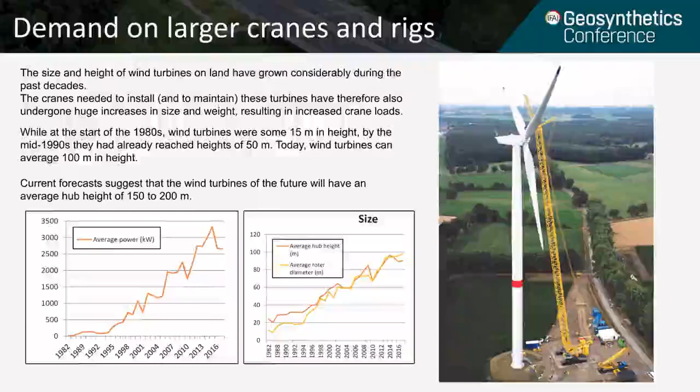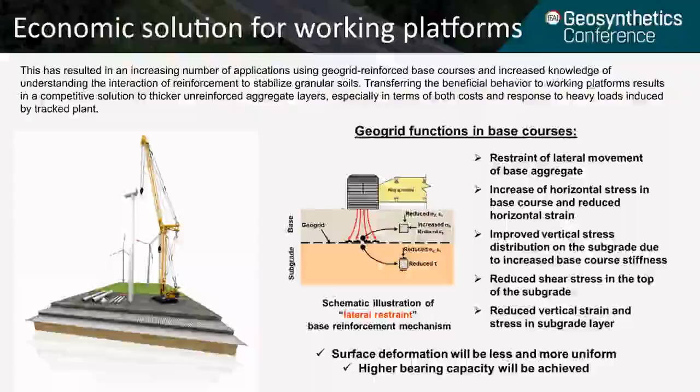It is very crucial to design the working platform package, including the thickness of the platform as well as the type of geogrids, precisely in order to withstand the operating loads from the construction machine on site. Otherwise, an accident or unexpected failure may happen. Here we have collected some types of failures that occurred over time in the past. Some were due to the very low distance of the construction machine from the edge of the platform, for example, the one in Brunei, Asia, or others because of very concentrated loads underneath the track, which caused a punching shear failure of the platform. Or it could be due to serviceability reasons because of very large deformation of the platform, which caused the tilting of the machine.

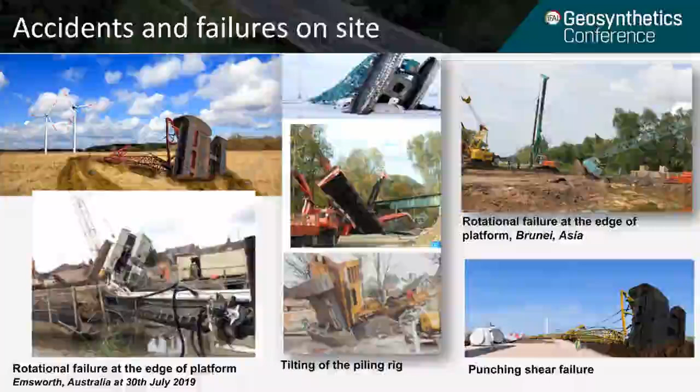So we have to learn lessons from the past and see which failures happened already and try to avoid them for future cases. For a precise dimensioning or design of a working platform on site, we need to perform 3 important analyses. The first one is the punching shear failure of the working platform.

This is a failure which normally happens when the working platform is subject to very high compression loads, and is characterized by very large settlements and deformations of the working platform.

There are different approaches in order to use it, and the most popular one is the BRE 470. This is not because of the accuracy of the model, it's because of the simplicity of the model and because of the wide range of application.

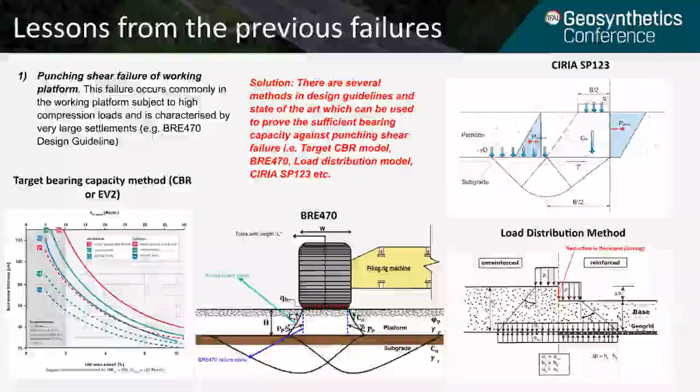You can use this model for cohesive soil and non-cohesive soil, but there are several weaknesses of the model that should be overcome in order to achieve a more accurate and safe design for punching shear failure of the working platform. The second analysis, which is normally neglected in practice, is the overall and rotational stability of the working platform,

using which we are able to identify the potential failure surfaces over which the construction machine, the working platform, and the subgrade may slide. This is an important analysis, especially when the subgrade is weak or when the construction machine is positioned very close to the edge of the platform, for example, 2 or 3 meters distance from the edge.

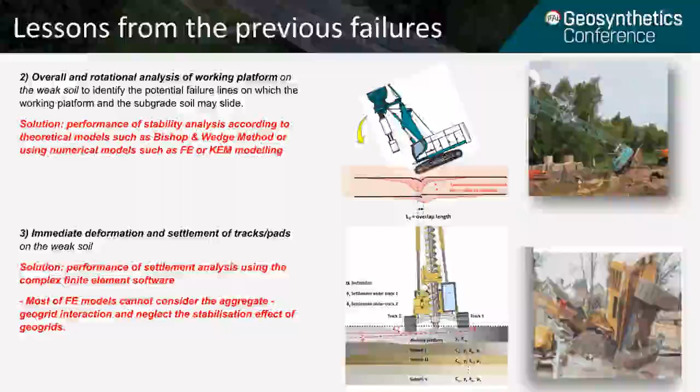The third analysis is related to the serviceability of the working platform, and using this analysis we are able to estimate the deformation and differential settlements underneath the track of the platform, and accordingly see how much would be the maximum inclination of the construction machine, and to control it.

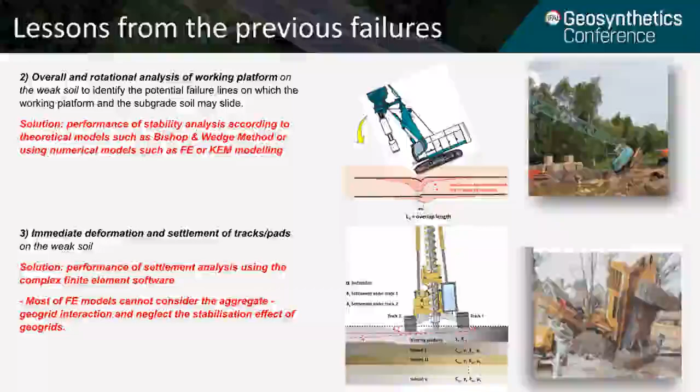For this purpose we normally need complex numerical models or complicated analysis, and even sometimes finite element modeling may not help us because it doesn't consider the stabilization function of GeoGrid, which is related to the interaction of GeoGrid and aggregate.

In general, there are several weaknesses in the current design procedure of working platforms that should be overcome in order to achieve a more reliable, economical, and in general, a better design procedure for working platforms. For example, the main important one is that the rotational failure of the working platform is neglected.

However, as I mentioned in the previous slides, there are several cases in which the rotational failure of the working platform becomes dominant. For example, when the construction machine is very close to the edge of the platform, or when the subsoil bearing capacity is not high.

The second one is that the immediate deformation of the working platform, which may cause the inclination of the machine, is normally neglected because of the complexity of the analysis.

And in general, the main important parameter, or let's say the only analysis which is considered for the design, is the shear failure of the platform. And even this analysis is dramatically simplified by some of the models.

For example, the one in BRE 470, which considers the actual failure plane of the working platform to be a vertical plane, which is not realistic, or it considers that the tensile strength of the GeoGrid is only mobilized in a two-dimensional environment.

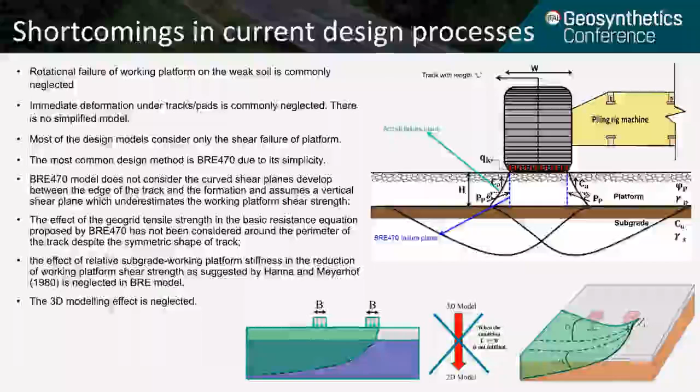And that's why in this study we have tried to overcome some of the weaknesses and to come up with a better and more reliable design process.

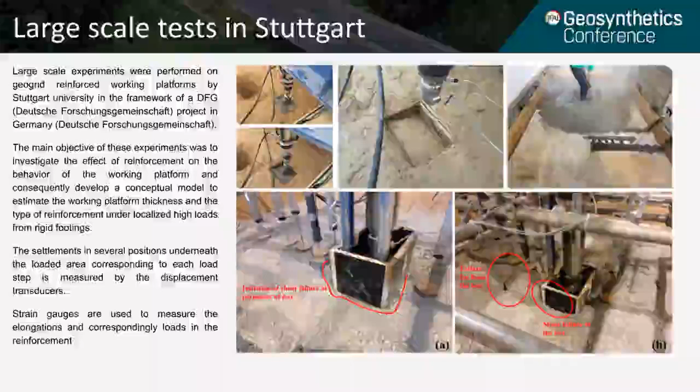With this background, we decided to improve the model from BRE 470, considering larger scale tests in Stuttgart. The test was set up for different arrangements of geogrids: with no reinforcement, with one layer of reinforcement, with geocomposites, and with 2 layers of reinforcement, in order to compare different cases with each other and see the effect of geogrid installation on the increase of bearing capacity of the working platform.

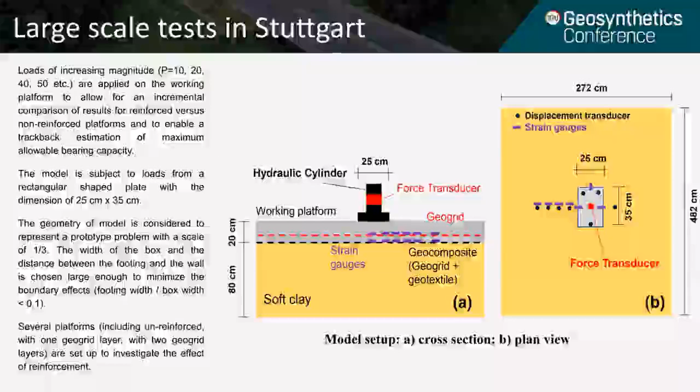There are loads with increasing magnitudes from 10 kilonewton to higher values applied on the platform. Here we focused on the results related to reinforced and unreinforced platforms, and the results showed that the reinforcement will increase the bearing capacity and the allowable load on the platform moderately, up to 25%, and accordingly the settlements related to the reinforced platform are considerably lower than the unreinforced platform.

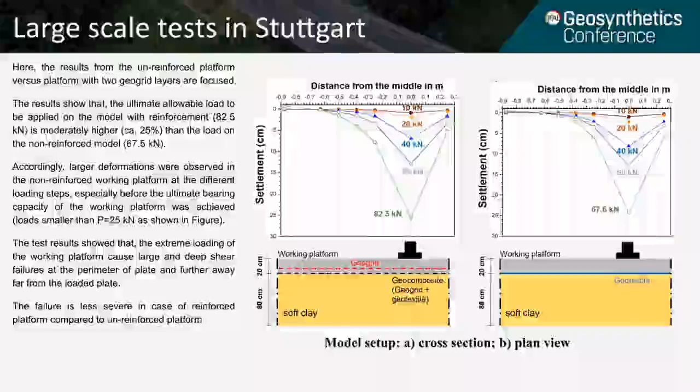Besides, we have used the data from larger scale triaxial tests at Aachen University in order to investigate the mechanical properties of the soil and to see how the elasticity modulus and friction angle of the soil will be increased by application of 1 layer, 3 layers, and 5 layers of geogrid.

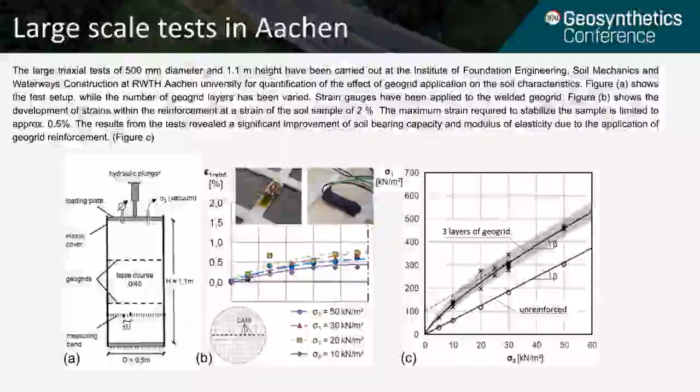So we used the shown methodology in order to develop a new model that can be used for design of working platforms, especially reinforced working platforms.

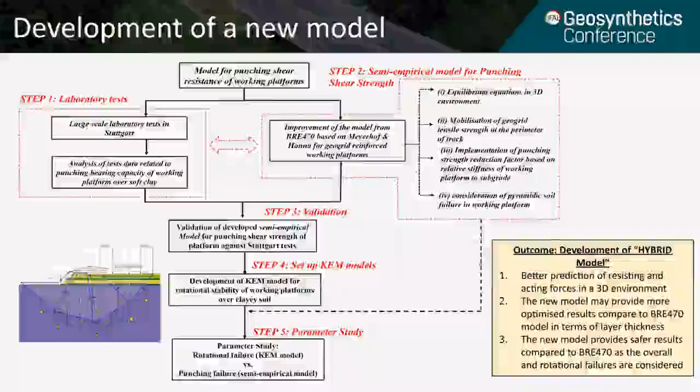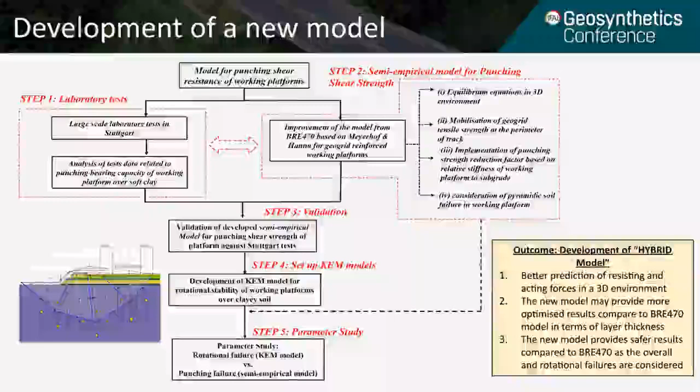In the first step, we focused on the results from the laboratory tests, as shown in the previous slides, and using the experience from the tests and experiments, we tried to modify the model from BRE based on the theory of Meyerhof and Hanna.

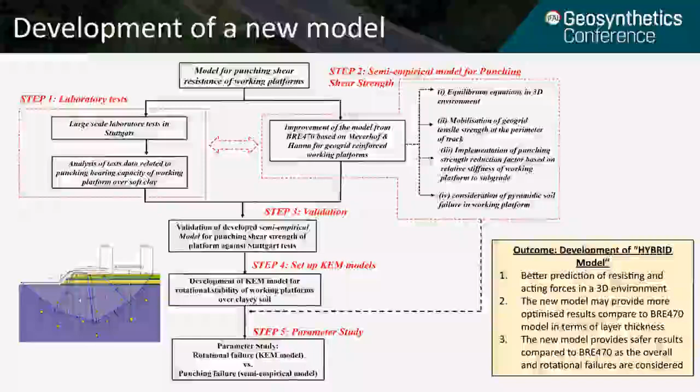We made modifications such as solving the equation in a three-dimensional environment, mobilization of the geogrid tensile strength at the perimeter of the structure, at the perimeter of the track,

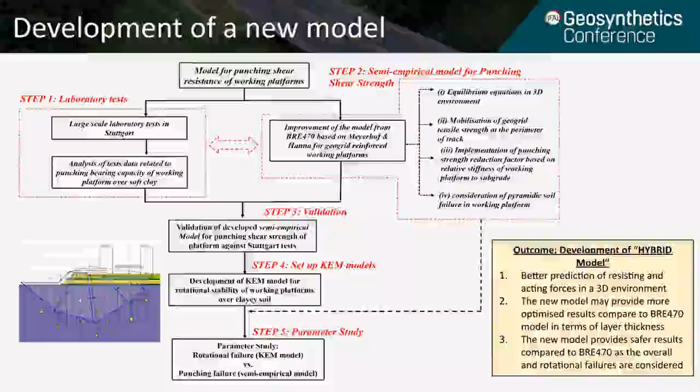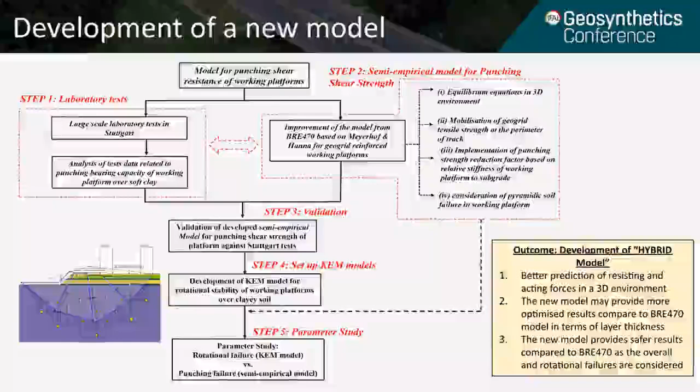and also assuming a failure plane which is more realistic compared to the plane assumed by BRE 470. Once the model was improved, we performed the validation procedure, set up kinematic element models, and compared the results of the model with the KEM models. In the end, we performed a parameter study for different ranges of soil properties, for weak soil and soil with higher bearing capacity, in order to validate the model for different conditions.

On this slide, you can see the results of the validation of the hybrid model and a comparative study between the hybrid model and the BRE model for the parameter called the allowable load on the working platform. The allowable load is calculated once by the hybrid model and once by the BRE model, and it has also been measured from the experiments.

The graph shows the relationship between the value predicted by the model and the value extracted from experiments. In order to be on the safe side, we need to be under the line where Q test equals Q model; otherwise the model produces unsafe results. The closer we are to the line, the more optimized the model is.

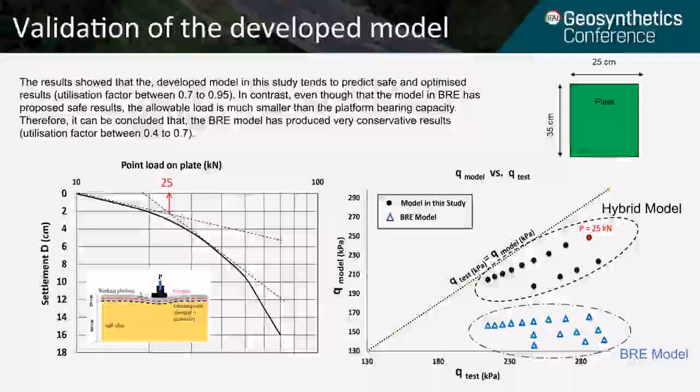Here you can see the result, and it can be concluded that the hybrid model produces more optimized and more economic results compared to the conventional BRE model.

On this slide, you can see the results from the Aachen University tests, showing how the application of 1 layer, 3 layers, and 5 layers of geogrid increases the mechanical properties of the soil. Here we focused on the elasticity modulus of the soil, because it's the most important parameter for determining settlement and deformation of the soil.

It has been shown that by application of laid and welded geogrids, it is possible to increase the soil elasticity modulus by up to 70%.

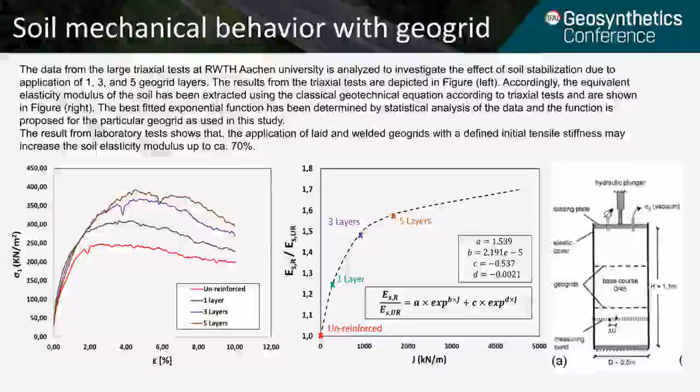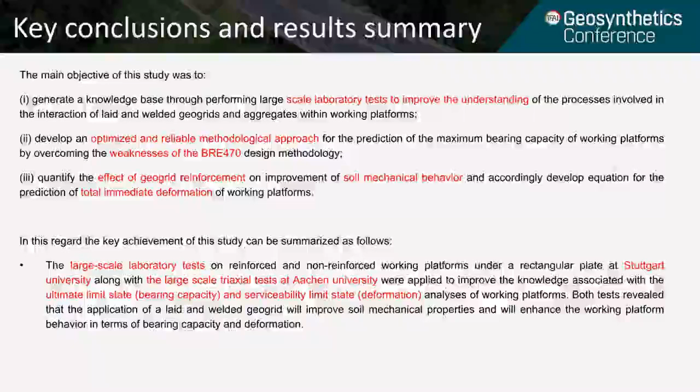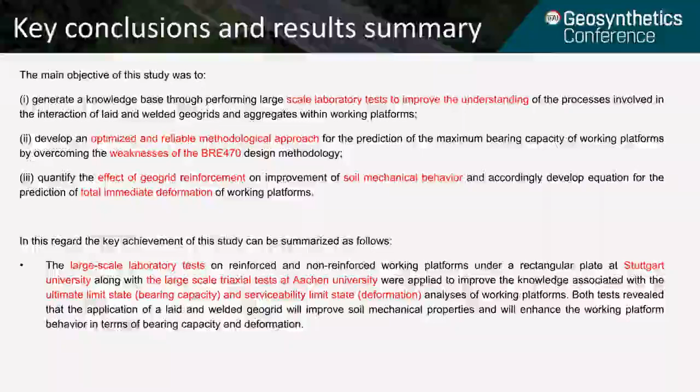So the main objective of this study was to provide a knowledge base through large-scale laboratory tests and to improve understanding of the interaction of geogrids and aggregates for working platforms. It was also planned to provide a reliable methodological approach for calculating working platforms under large concentrated loads, by overcoming the weaknesses of the BRE model, and to provide a relation for calculating the immediate deformation of working platforms.

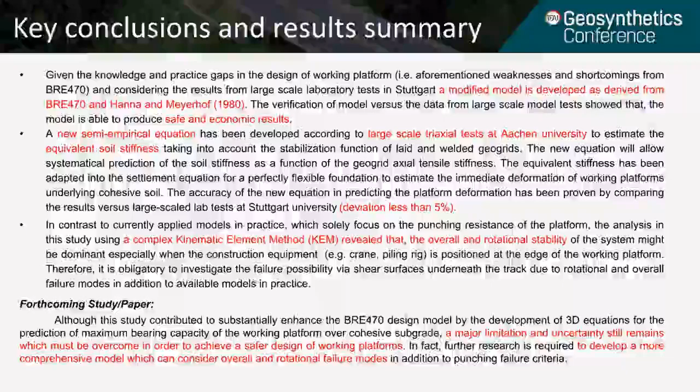The objectives have already been achieved, and a new model has been developed which can produce safe and reliable results.

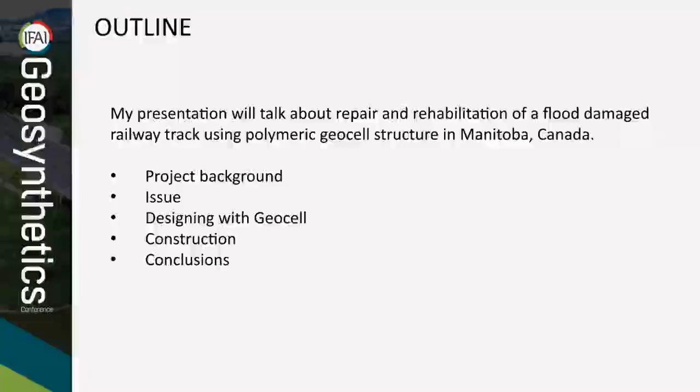The project is the railway line between Gillam and Churchill in Manitoba. Churchill is a port city in northern Manitoba at the mouth of the Churchill River on the shore of Hudson Bay. The nearest roadhead is the village of Gillam, approximately 300 kilometers south of Churchill.

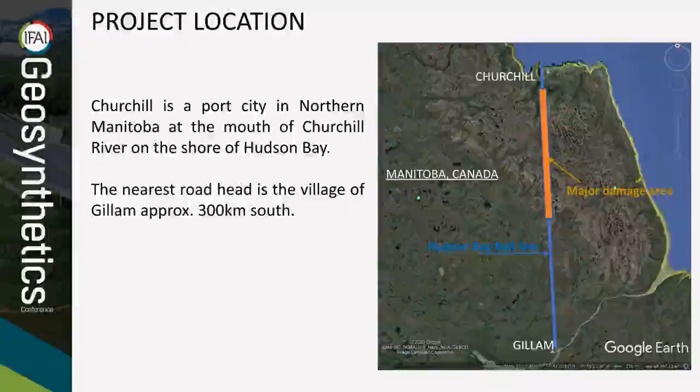The length of the track under consideration is shown with a thick line along the railway, as the major damage area in the photo shown on the right side. Built in the early 1900s and operational until spring 2017, the rail track crosses several stretches of permafrost. It is the only mode of land transport to Churchill. Lateral spreading of expensive ballast and subballast material, along with permafrost degradation, had impeded the smoothness of the rail ride.

After a site visit in May 2016, polymeric geocell reinforcement to improve the track condition and protect the subgrade was recommended. A flood in spring 2017 rendered the track unusable and exposed permafrost at several locations.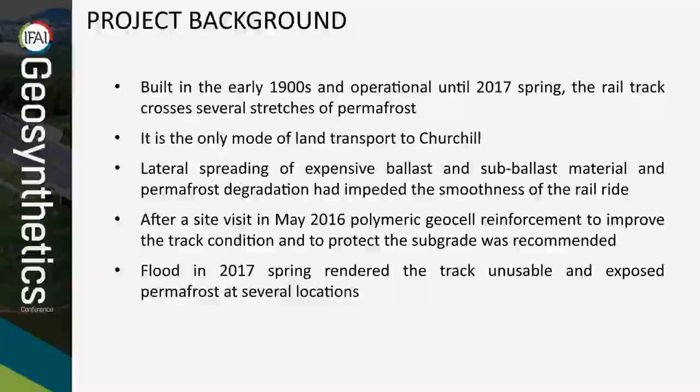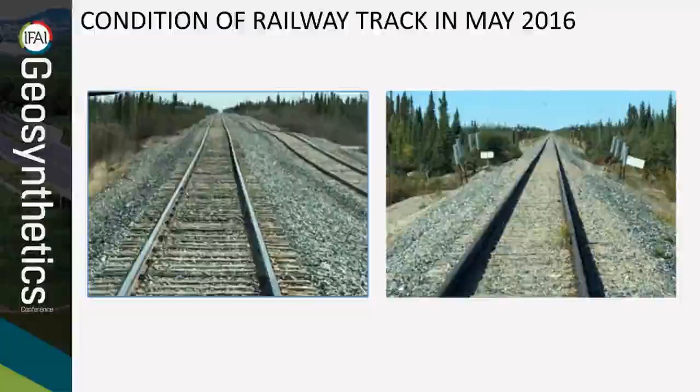These pictures were taken during the site visit in May 2016. They show the condition of the rail track. The picture on the left clearly shows the poor riding condition with uneven settlement. The picture on the right shows previously installed thermosiphons, but the site visit could not confirm whether they were operational.

The flood of spring 2017, triggered by melting snow and rain, caused damage to the underlying permafrost as well. There were 26 locations needing immediate repair in the damaged section of track. Of those, 12 locations had washout lengths up to 210 meters, while others were shorter than 70 meters. These locations also needed new culverts for stream crossing.

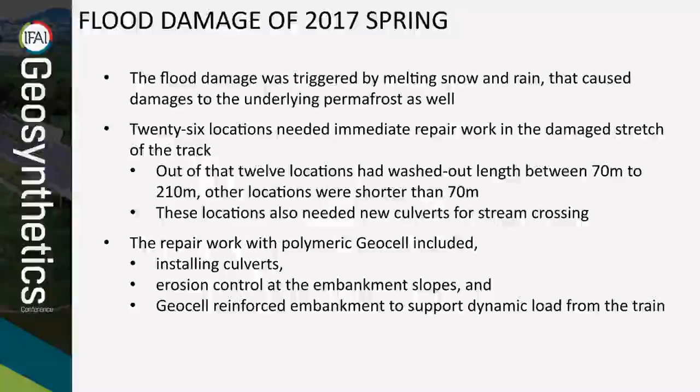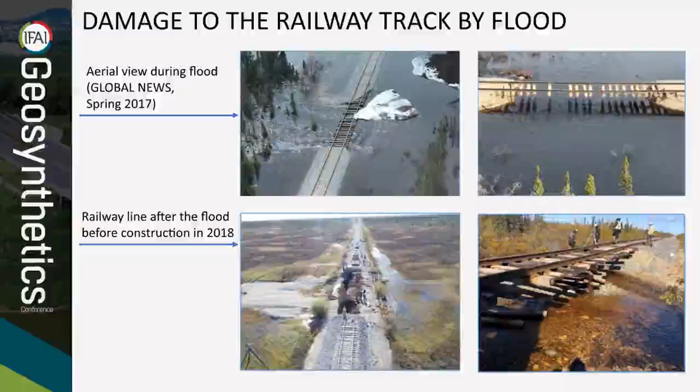Issues on the railway track included severe lateral spreading of the ballast and subballast material, erosion of the embankment material at the side slopes, washed-out culverts, and the need for culverts at a couple of new locations. There was also exposed degraded permafrost at the washed-out locations, a harsh winter with a shorter construction season and linear construction sequence, and limited available budget.

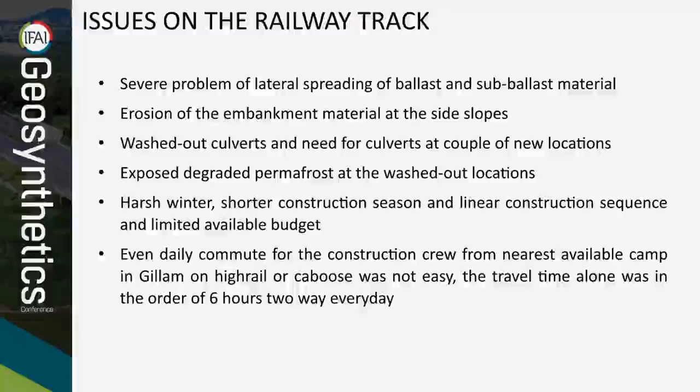Even the daily commute for the construction crew from the nearest available camp in Gillam, on high rail or caboose, was not easy. The travel time alone was on the order of 6 hours two-way per day.

Understanding the sustainability requirement, a design solution was proposed. A high-strength and highly creep-resistant novel polymeric alloy geocell was chosen as a reliable option to improve structural strength and provide confinement and erosion control benefits to counter these issues.

Geocell expedited the work and reduced the budget as the washed-out waste material was reused. The design was proposed to provide necessary structural strength for railway traffic, protect the underlying permafrost from further degradation, provide erosion control at the embankment slopes, facilitate a linear construction schedule, complete the job in available time and budget significantly less than estimated for conventional construction, and control the lateral spreading of the subballast material.

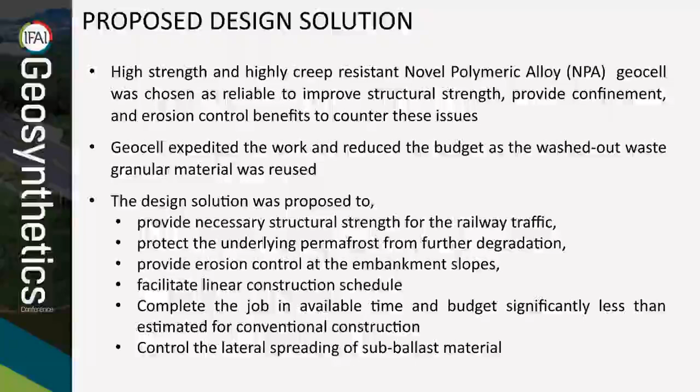In the next two slides I will talk about geocells. First, geocell in load support application. It provides lateral and vertical confinement, a stiffer layer to distribute loads over a wider area, reduces stress on the subgrade, creates a thicker reinforced zone, and produces a beam and slab effect.

The pressure bulb on the right is when it is reinforced, and the pressure bulb shown on the left is the unreinforced case. This is developed from Pokharel 2010.

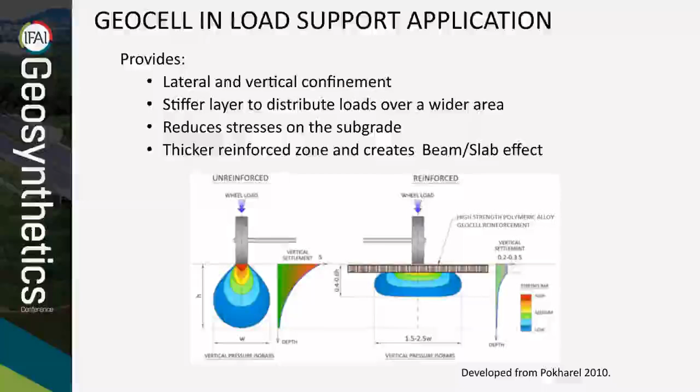Use of polymeric alloy geocells: geocell is a proven technology since the 1970s, developed originally by the US Army Corps of Engineers. High-strength polymeric alloy geocells are a recent addition. Design methods are available after rigorous research conducted at various institutions all over the world.

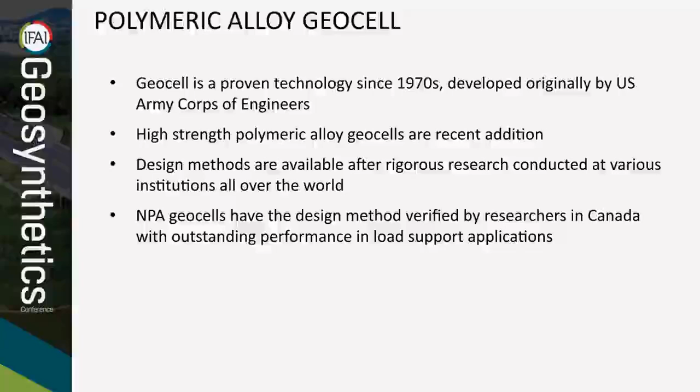NPA geocells have design methods verified by researchers in Canada, outstanding performance in load support applications. Regarding design basis for this project, AREMA and CN railway design principles were checked.

The slab effect by geocells to protect the weaker region within the permafrost was anticipated, with wider load distribution. Only 5% of the applied stress on top was transferred to the subgrade. Boussinesq's method on stress distribution and stress reduction by geocell were used to calculate the stress transferred to the underlying layers. The design used a modulus improvement factor of 3.5 to 4 by geocells.

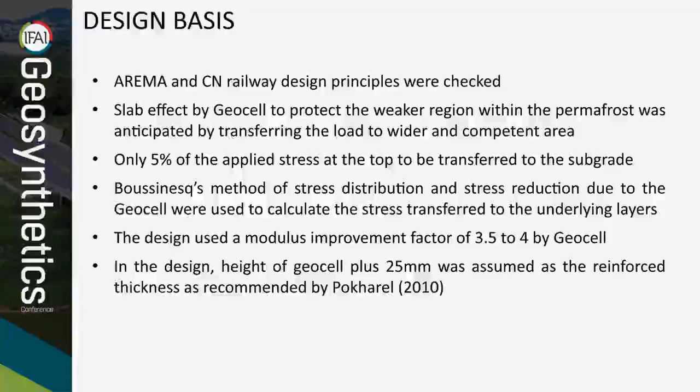In the design, the height of the geocell plus 25 millimeters was assumed as the reinforced thickness, as recommended by Pokharel 2010. There was very limited information available for design: an aerial visual survey and photo taken from a helicopter, a photo of damaged sections from a site visit taken by a person with a GoPro, and the size of previously existing culverts from HBR records.

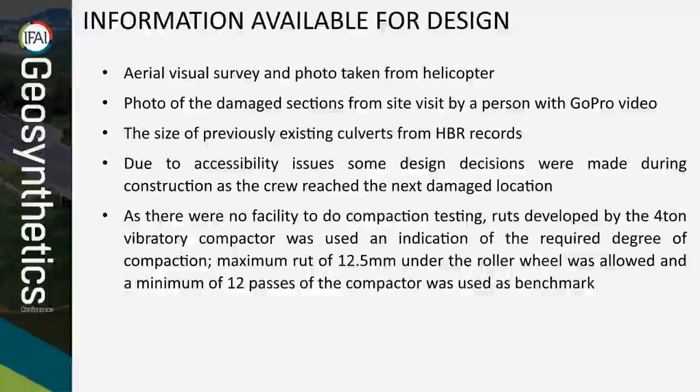As there was no facility for compaction testing, a 4-ton roller was used. 12.5 millimeters under the roller was taken as the maximum rut, with a minimum of 12 passes used. This slide shows the typical design sections used for the construction.

The drawing on the right side shows a double layer structure where the permafrost was also damaged and there was exposed surface of permafrost. On the left side, where the permafrost was not damaged and only washout had happened on top, there was a single layer design, as shown in the drawings.

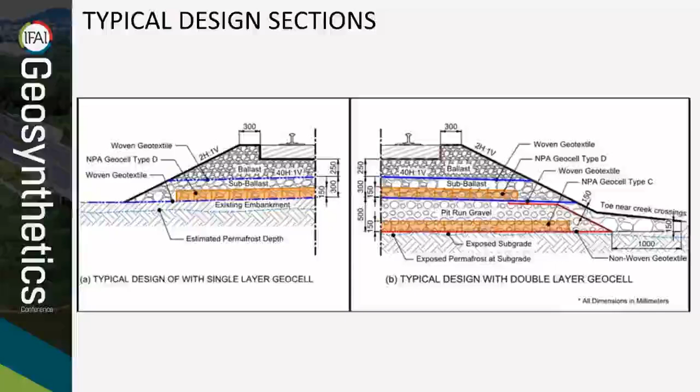Material used in construction: ballast material required was hauled in from Gillam, which is 200 kilometers to the south. Subballast was reuse of washed out granular material available at the location, and when extra material was required, it was brought from Gillam, 75 millimeter minus pit run sandy gravel.

Geotextile: 890 Newton woven geotextile, and non-woven geotextiles of 911 Newton and 1330 Newton were used. Nanopolymeric alloy geocells were used with a height of 150 millimeter and 330 millimeter between the weld seams. Type C and Type D, two types were used. Type C had 19 kilonewton per meter strength and Type D had 22 kilonewton per meter.

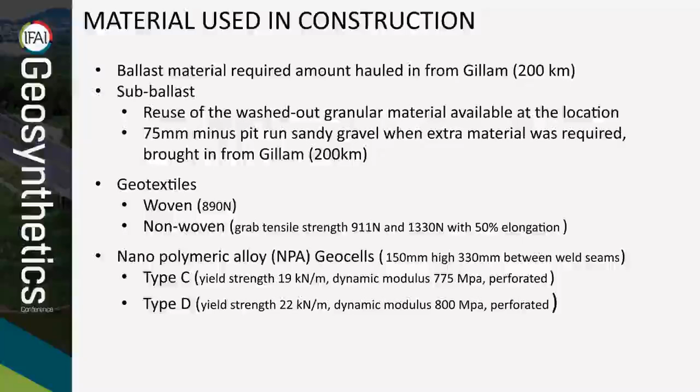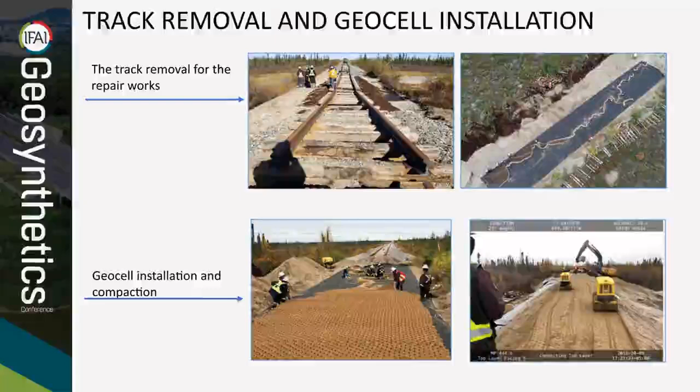The next two slides show pictures during construction. Track removal and geocell installation is in this slide. The top two pictures are the track removal and the repair work. The bottom two show the geocell installation and compaction below the subballast layer.

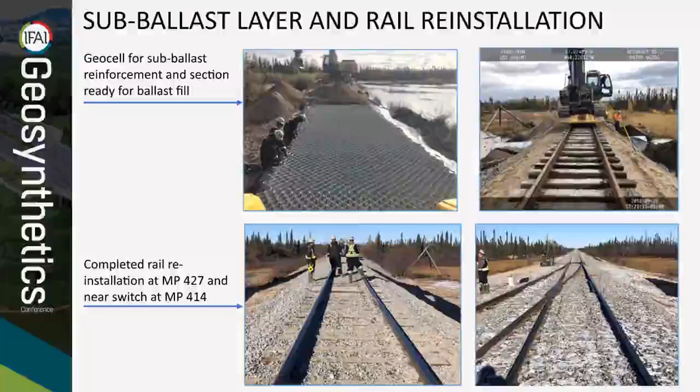In this slide, the top two pictures show the installation of geocells for the subballast layer, that is Type D geocell, and the installation of ties and rail. The bottom two pictures show the completed sections.

Let us discuss the design. The design gave due consideration to structural requirements and environment: protecting permafrost, controlling track degradation, erosion at the embankment slope, and strengthening the subballast structure. The use of available aggregate from the washed out location reduced virgin aggregate extraction by about 50%.

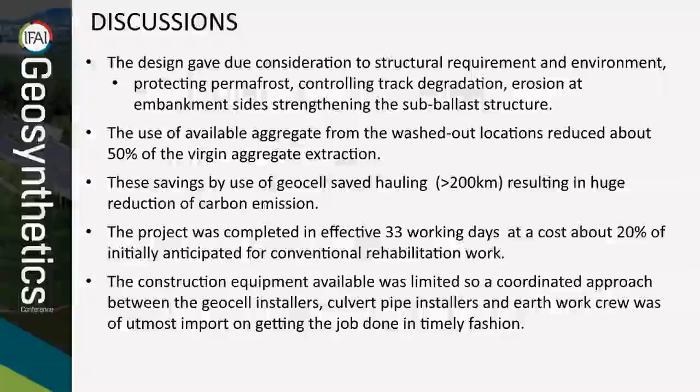These savings by use of geocell avoided hauling more than 200 kilometers, resulting in a huge reduction of carbon emission. The project was completed in effectively 33 working days, at a cost of about 20% of what was initially anticipated for conventional rehabilitation work. The construction equipment available was limited, so a coordinated approach between the geocell installers, culvert pipe installers, and earthwork crew was of utmost importance in getting the job done in a timely manner. It was very coordinated; otherwise, in that harsh climate, it would not have been possible to complete it in 33 working days.

This is the day we were all waiting for: the train arrives in Churchill after 2 years. Work was completed just when daytime temperatures started falling sub-zero. Access was granted on 31st October 2018, after approval of the Transportation Safety Board of Canada. This railway has been in operation for more than 2 seasons without any known issues of operation.

Before jumping into the conclusions, it is important to see how things turned out for this project. We were called in to improve the railway line just for the riding conditions. There was no smoothness; they wanted to run the railway at 50 kilometers per hour. We recommended using geocells, but it didn't happen.

Then the flood came and damaged the railway completely. We said these solutions could be done quickly, but it took almost 2 years to convince them that geocell is the better solution and that it works.

The conclusion is the NPA geocell reinforced design of the railway embankment proved to be a successful solution for maintaining and strengthening the railway structure. Geocell reduced the carbon footprint by reducing the amount of material required and reusing the available washed out material at the site. Geocell helped control lateral spreading of the poorly graded sandy pit run gravel subballast, control settlement and damage of the permafrost, and control embankment side erosion.

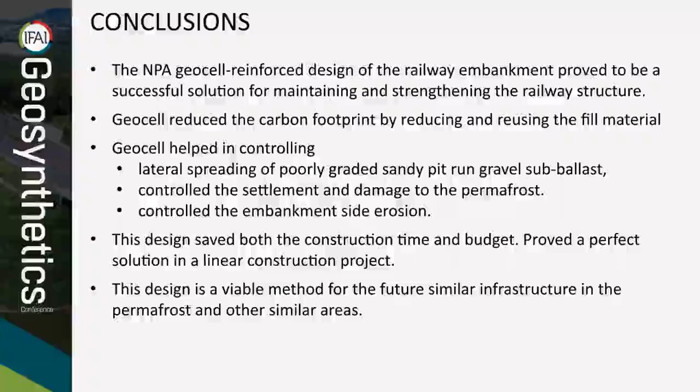One thing to think about here: we wanted to reinforce the ballast with geocell too, because that would have strengthened the ballast and minimized lateral spreading. But the problem was the tampers — tampers would have damaged the geocell, so we couldn't do it. If we had used geocell, we'd have needed 3 inches more material. That's why we didn't use geocell reinforced ballast.

I would like to thank all of you for listening to me. I have just shown a case where geocell was the best option.

Cofferdam systems have been used for many years in civil construction waterway applications. These have included steel pile cofferdam systems, earthen cofferdams, as well as rock-filled cofferdam systems. For about the past 20 years, we have been increasingly seeing the use of geosynthetic modular cofferdams.

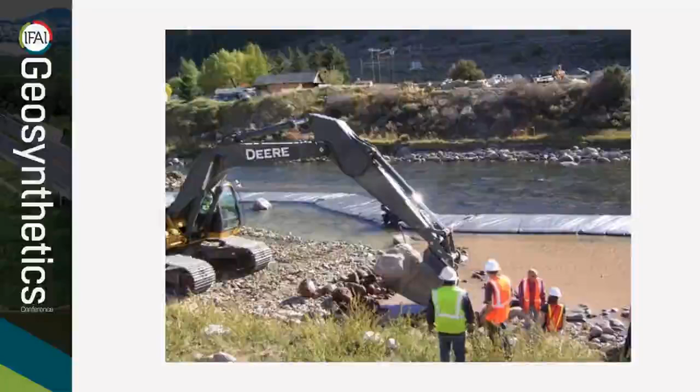This picture is a good example showing the installation of a 6-foot diameter geosynthetic cofferdam in a section of the Eagle River in Colorado. This was part of some shoreline construction activities.

Cofferdams are used as temporary barriers in or near a water source to help allow dewatering, diversion, or damming of water. They partition off or hold back water, helping to create a dry area, allowing a project to work on time and safely. There are temporary cofferdams versus permanent dams, typically concrete dam systems. There's different materials used in cofferdams: earthen dams, rock-filled, steel, timber, and concrete.

There's various different cofferdam systems: cantilever sheet pile dams, steel brace dams, earth embankments, double wall, and cellular cofferdam systems. As mentioned, increasingly we're seeing the use of modular or portable geosynthetic cofferdams.

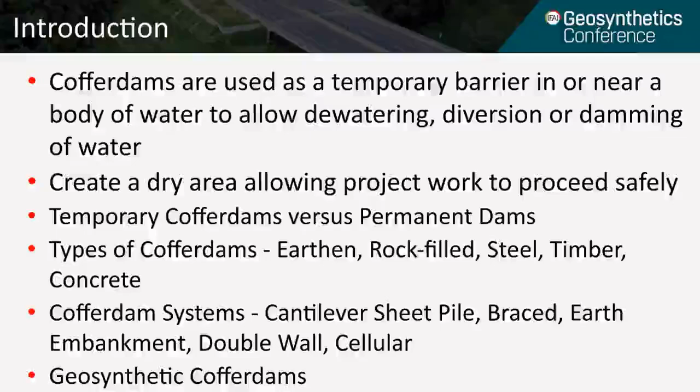There's different applications for geosynthetic cofferdams. The main applications are dewatering, diversion, damming, and flood control. Specific applications include new bridge construction and repair work to existing foundations. They're also used extensively for pipeline crossings, including new pipeline work and pipeline repair and maintenance, irrigation canals, river crossings and diversions, as well as overall shoreline civil construction applications.

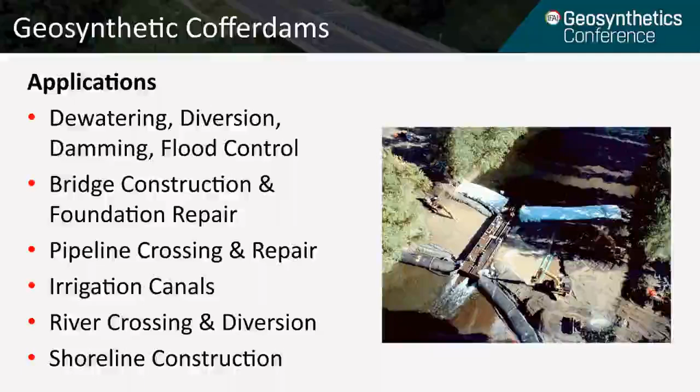The picture on the right shows a unique project in northern Alberta. It's a double cofferdam system. Upstream, you see the white cofferdams. Downstream, you see the black cofferdams. In between is a steel flume allowing water to flow in between, while equipment is being used for construction and dewatering activities.

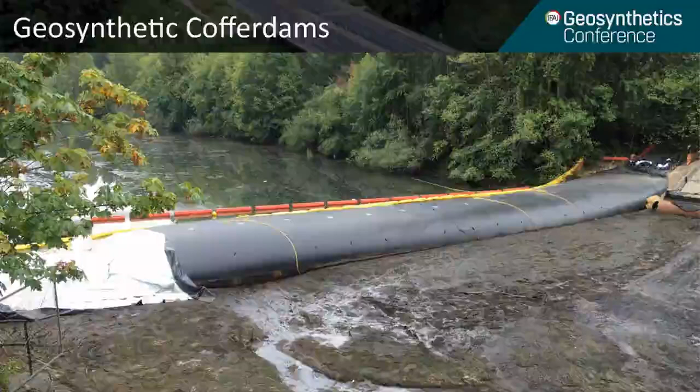This picture shows an 8-foot diameter geosynthetic cofferdam installed in the Green River in Washington State. We're actually using pumps onshore to divert water around the dams while we dewater this site to support construction activities downstream.

There are different geosynthetic cofferdam systems available in the marketplace. Specifically, our geosynthetic cofferdam is made with 2 NSF grade impermeable water-filled inner tubes, and they're normally filled with the local water source on site. These inner tubes are protected with a high-strength geotextile outer wrap material.

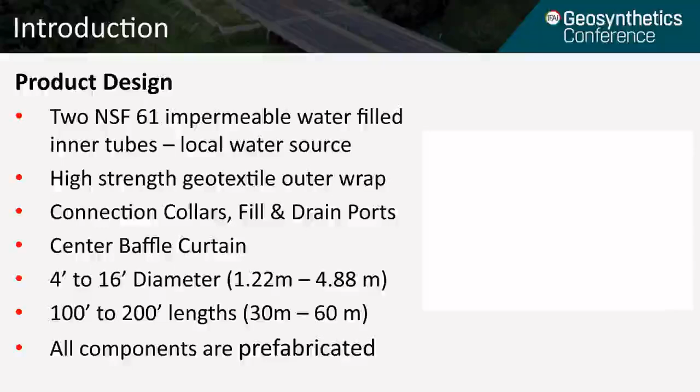To connect the dams on site, we have special connection collars, and each dam comes with a fill and drain port system. The system is also available with a patented center baffle curtain, which helps to prevent tipping and movement of the dam. The dams are available in different sizes, from 4 feet to 16 feet in diameter, or 1.2 meters to 4.88 meters, and standard lengths are available from 100 feet to 200 feet, or 30 meters to 60 meters. We will custom produce dam lengths based around project size requirements. All components of the geosynthetic cofferdam are prefabricated in our factory.

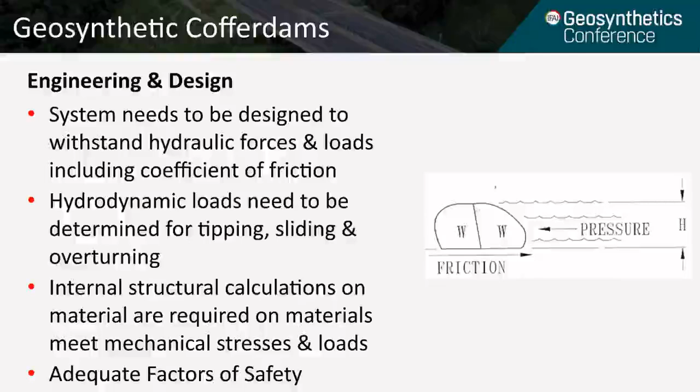All geosynthetic cofferdams need to be properly engineered and designed. Systems need to be designed to withstand hydraulic forces and loads, including the coefficient of friction of the bottom of the dam and the subgrade application. Hydrodynamic loads need to be determined for tipping, sliding, and overturning of the dams. Internal structural calculations on the materials are required to ensure the materials meet the mechanical stresses and loads, and adequate safety factors must be built into the design. The drawing on the right shows the typical lateral forces of water and how they impact the design application.

There's numerous advantages to geosynthetic cofferdams. They're normally very lightweight in their design and come prefabricated and ready for rapid deployment. They're also modular in their design, coming with different types of connection systems or collars. They're very flexible, can handle bends and turns and different configurations of site conditions. They provide far less environmental impact, are easier and quicker to install as well as remove, and are very economical compared to other structural cofferdam systems. They can also be used to store water temporarily on site for different types of remediation and cleanup applications.

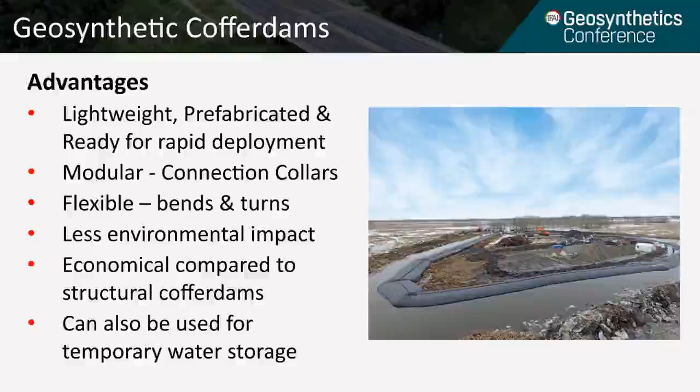The picture on the right just shows the flexibility of portable cofferdams and how they can be configured to your specific site conditions.

There are a number of risks and challenges to installing geosynthetic cofferdams. One of the main challenges is trying to do installations in moving water, and certainly fast-moving water. Projects need to be designed to calculate hydraulic forces of these water flows. We also need to be concerned with deep water installations and need to know the water depth at all times. Potential punctures from debris in fast-moving waters can also be a concern.

It's also very challenging doing installations around ocean tidal forces. In terms of flood control levels, we must know peak flood levels. We also need to know subgrade conditions and site access conditions. And of course, at all times, we need to be concerned with employee safety.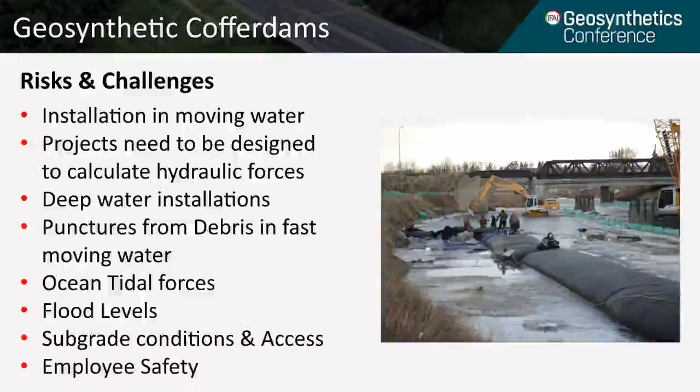To address the various installation challenges, we require proper risk mitigation measures be undertaken. This includes proper site risk assessment for each project. We need to know the water body type - are we dealing with a stream, river, lake, or ocean? And we need to know the water depth and flow rates, based on historical depths and flow rates.

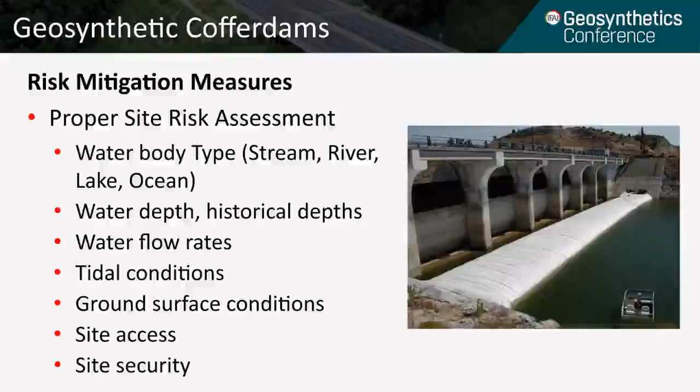We need to know tidal conditions. We need to know ground surface conditions, what type of site access we have, and whether or not we have site security.

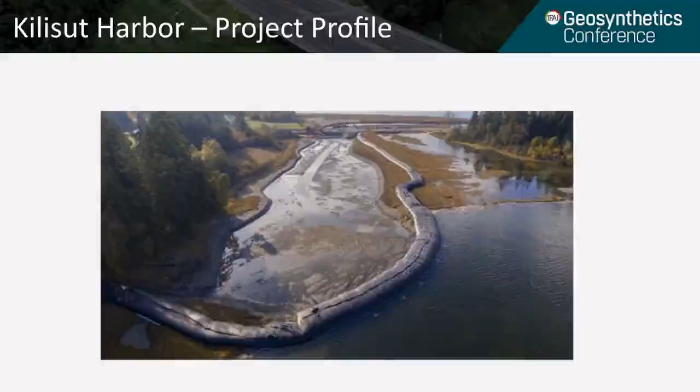This picture shows a very unique recent project we did for Kilisut Harbor in Washington State. This was done in 2019, working with the North Olympic Salmon Coalition and Washington State DOT. They needed to restore historical tide channels as part of a fish run between southern Kilisut Harbor and Oak Bay.

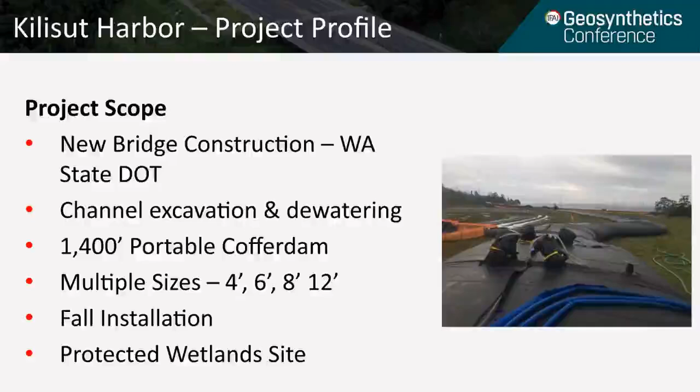The overall scope of the Kilisut Harbor project included the general contractor needing to build a new bridge and causeway in conjunction with working with the Washington State DOT. This required an extensive channel and dewatering excavation. Our scope included supplying and installing 1,400 lineal feet, or 427 meters, of portable cofferdams. These needed to be done in multiple sizes, including 4-foot, 6-foot, 8-foot, and 12-foot sizes, or 1.2 meters to 3.7 meters. It was a fall installation, and we had to work around a protected wetlands site.

The Kilisut Harbor project faced a number of unique challenges. First and foremost, being a very environmentally sensitive region with strict conditions to protect the salmon fish stocks and migration. It was an overall wetlands area which strictly limited the use of heavy equipment and site access conditions.

We actually had to install the geosynthetic cofferdams by hand. We also had to work around tidal conditions, installing the cofferdams during low tide cycles only. The project also had strict monitoring and controls in place for silt and sediment release. And based on the fluctuation of water levels, we had to work with 4 different sizes of dams, making it very difficult to do the connections.

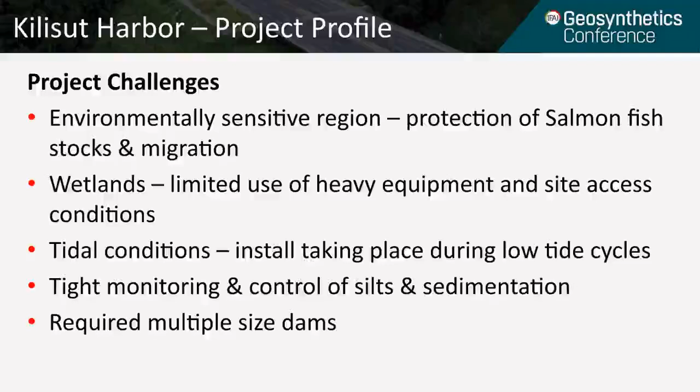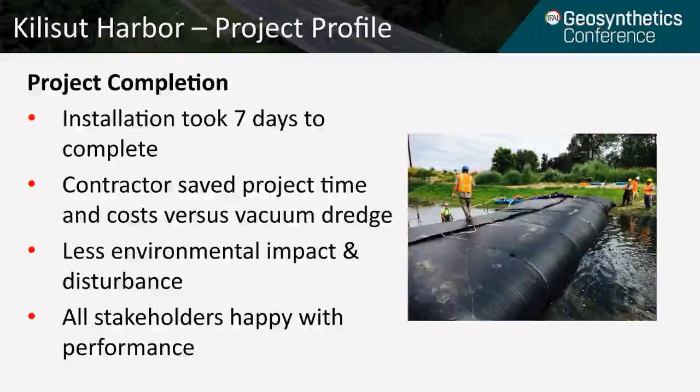The installation of the 1,400 lineal feet of geosynthetic cofferdam took 7 days to install. We had a 5-person crew on site, and the contractor also provided some labor. Contractors stated they saved significant project time and cost with the geosynthetic cofferdams versus using a vacuum dredge system. There was far less environmental impact and disturbance, and all stakeholders appeared to be very happy with the performance of the geosynthetic dams.

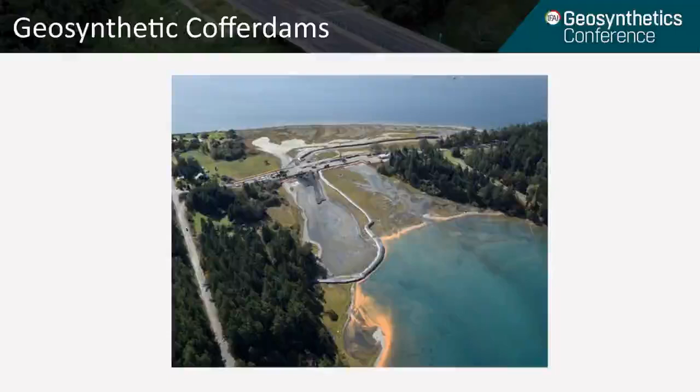This picture shows a great aerial view of the overall project. You can see the causeway under construction in the back. You can see the wetlands area, the channel that was constructed, and you can see the installation of the 1,400 lineal feet of portable geosynthetic cofferdam that was used for dewatering and silt control.